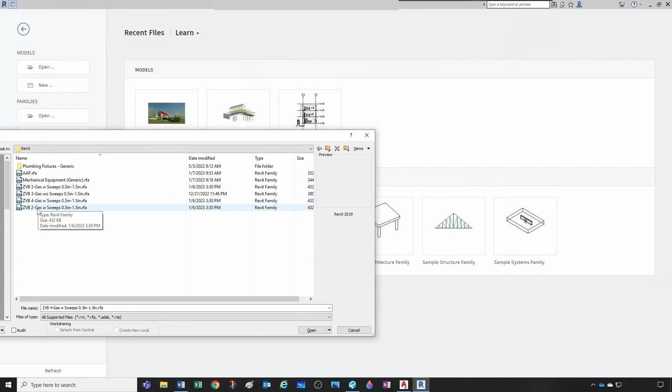I'm gonna open, and now I'm gonna go to the front view, and then if we go to the cut sheet, what you'll see is that this is the one we had, right? 3 gases, so we had this one, and this one. So all we have to do is shorten this a little bit so the box is 10.5 inch high, and it only has 2 connectors.

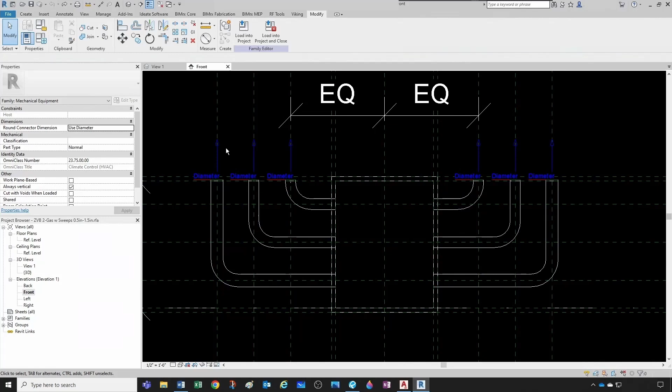I would say let's delete the 2 innermost. Actually, let's keep the 2 innermost and let's delete the 2 outermost so that the width remains as short as possible. So let's first delete the outermost connectors. So let's come to our extrusion, edit extrusion, and then let's delete this guy and this guy.

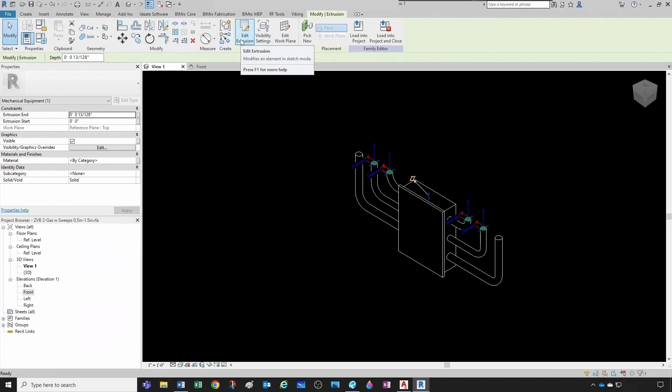The extrusion is now gone, and the connector which was hosted to the extrusion is also gone. So now let's delete the sweeps, and here. Now let's go back to our front view. Let's see if we can make a quick reference line here, a model line, like from here to here.

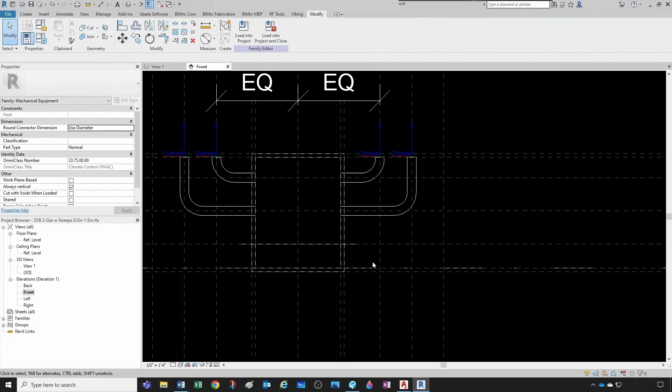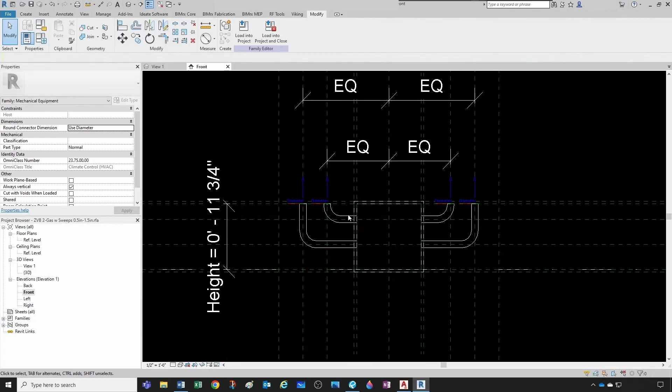And let's go ahead and delete this reference plane, and let's see if it allows us to move these 2 reference planes up from here to here. So it seems like this is pretty good. Now we just need to make sure that the height of the box has to be 10.5.

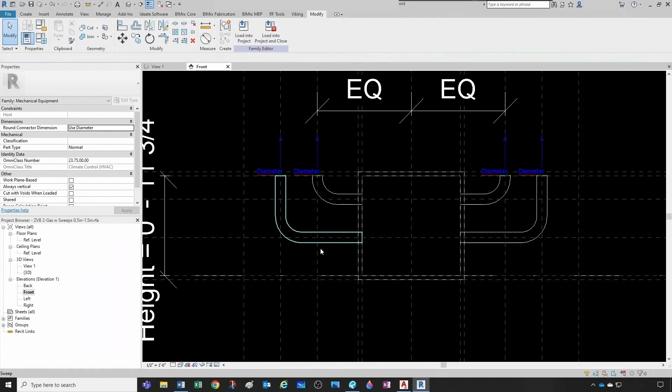How do we do this? We could probably just do another reference line. Let's see, 10.5 from here. But I don't want to modify this parameter like that because this was the fixed plane. So it's gonna make it shorter, but up here, and I don't want that. I want it to be shorter here.

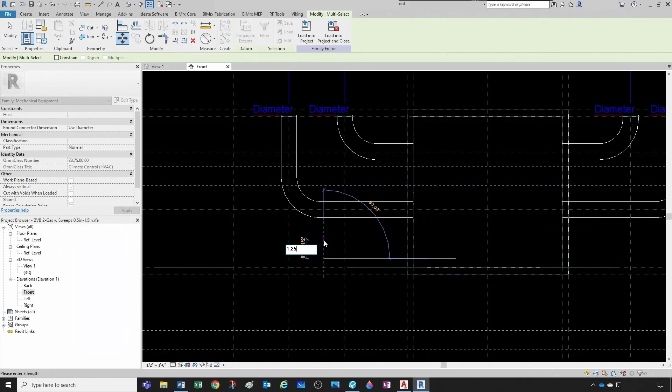So let's force that. We know that it has to be 10.5. So let's click here and click here and move up 1.25. And that would take this to 10.5. So this is the 2 medical gas box.

But keep in mind that these 2 connectors are of a system classification that is hydronic supply. So this is good for compressed air, medical air, but not for vacuum. If you want to use it for vacuum, you would have to change the connector to hydronic return because it would be sucking instead of pushing.

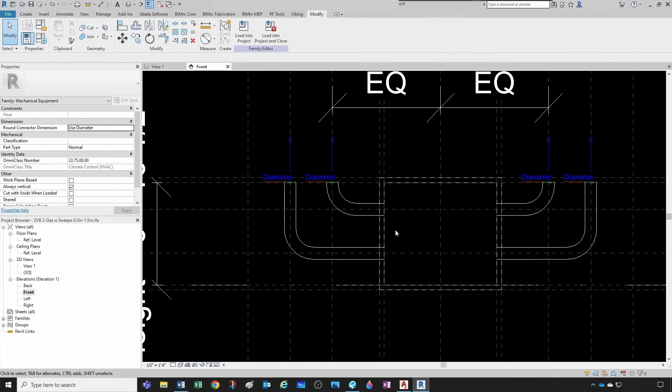We obviously have to clean this up a little bit, so we have to get rid of this parameter, we're not using it anymore. This horizontal offset, we're not using it either. Actually, we're not using any of these parameters anymore, because remember we replaced them with this one, the nominal pipe diameter. So this we can delete, this we can delete, and this we can delete.

We can rename this as 0.5, 0.5, since we don't have the third one. We can rename this one to 0.75, 0.75.

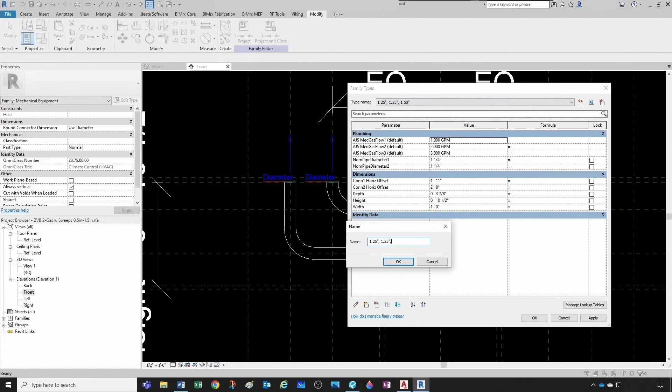We rename this one as 1, 1. And this one to 1.25, 1.25. We can actually delete these reference planes because we're not using them. And that looks pretty good. Let's take a look in 3D. Throw a little bit of shading in there. There we go. So that's the 2 gases. Let's go hit the 4 gases.

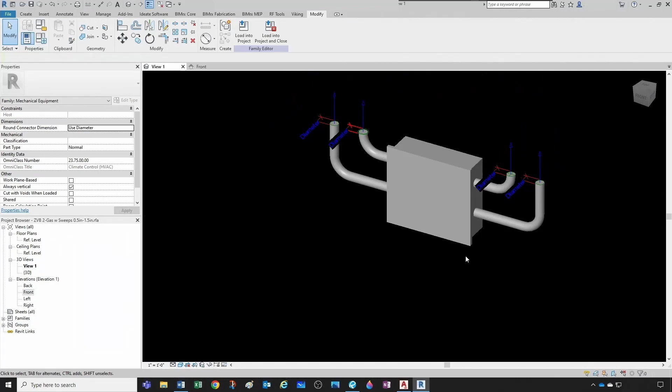I guess we'll never know, right?

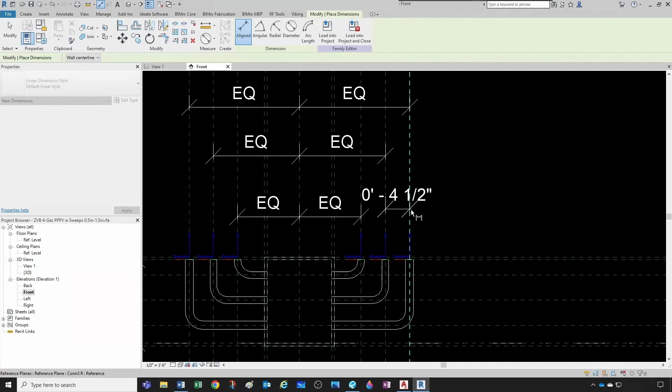So we open again the original 3 gas. Let's go to the front view. And here it seems that we would have to add another one down here. So the first thing we need to do is create a couple planes for the connectors, the new connectors. So what was the distance between here and here? 4.5 or something like that. 4.5. So right click here, create similar.

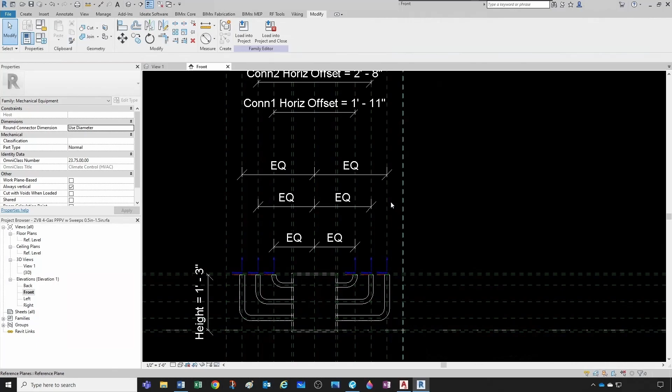We want to pick a plane. It's gonna be 4.5 inches of offset. And here we go, that's one. And this is the other one. And then we had named these planes like this, connector 3 right. So I'm gonna name this one as connector 4 right. And then this one as connector 4 left.

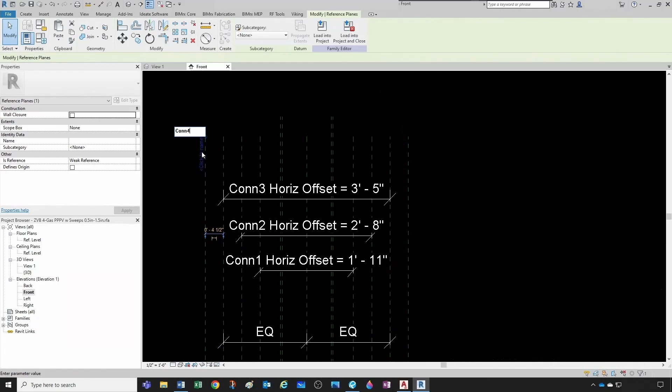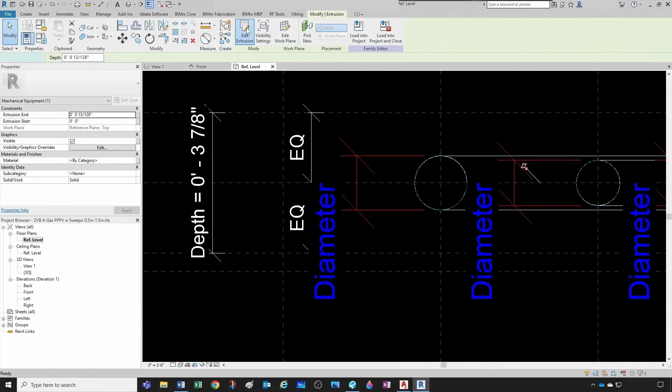Now we need to modify our extrusion here. So let's actually go to our top view, reference level. Then let's select our extrusion. I'm gonna do tab select, and then this is my extrusion. Let's edit that extrusion. And what I was gonna do is, let's just do a circle here somewhere. And then remember, we want to click on it and then make sure that the center is visible. So we can align AL to this plane, unlock it, and to this plane, unlock it.

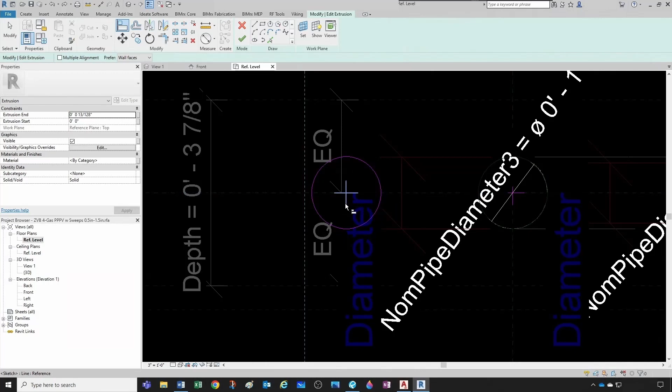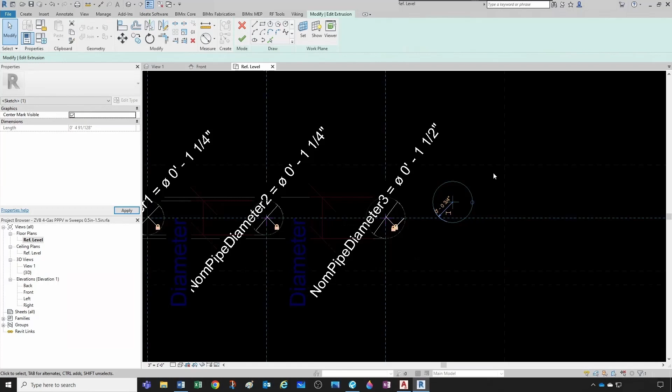And then we have to do the same thing on the other side. So right here, so let's create a circle. And remember, I'm doing this on purpose, offset, so that I can simply align to make sure that it's perfect. So AL to this plane, unlock it, to this plane, unlock it.

And now I need another parameter because before we only had 3 diameters. So now I'm gonna have a 4th one. So I'm gonna actually copy this name to have the same thing. You can always take a look at the previous parameter to make sure it was a family parameter type and it was piping, pipe size under plumbing. So let's do the same.

So a new parameter, it's a family parameter, it's a type parameter. The name is gonna be the same, but instead of 3, it's 4. We said that this was a piping parameter and it's a pipe size, and we grouped it under plumbing, and it was a type parameter, right? And now we just hit OK. And now let's keep this also as 1.5.

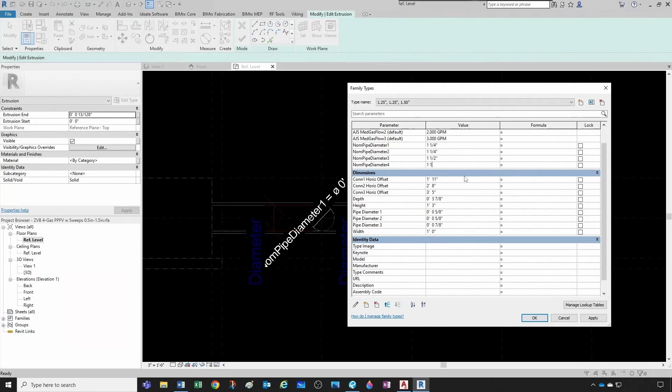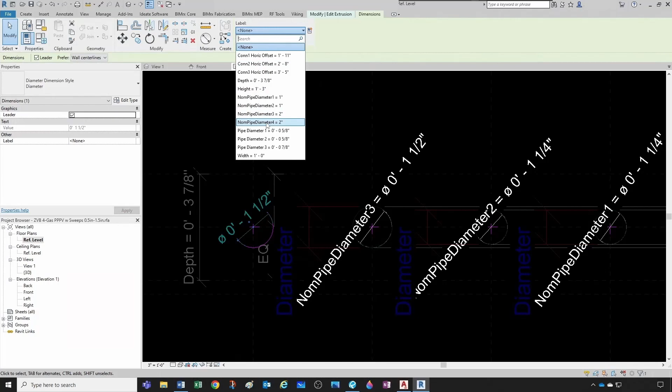And for now we don't see anything because that parameter hasn't been assigned to anything, right? So let's dimension this. And then we assign to that dimension the new parameter, nominal pipe diameter 4. And then we do the same thing with this one. Click here, nominal pipe diameter 4, and then we finish.

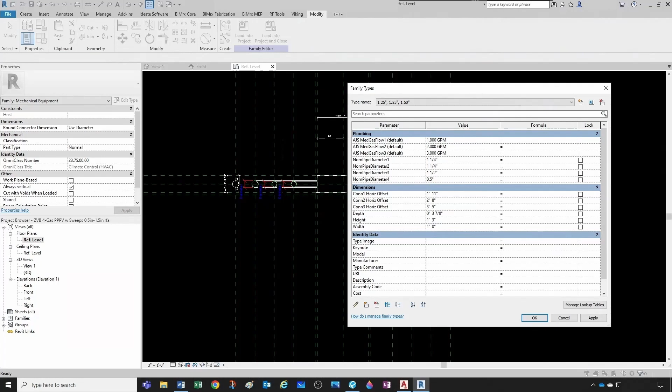Now, one thing that is important to note is that we shouldn't be using these pipe diameters anymore, right? Because we're using the nominal pipe diameter. So let's go ahead and delete this parameter, and this parameter. And now let's see how our last pipe diameter flexes. Let's go ahead and do, for example, 0.5 inches, and okay, and we can see how it gets reduced. So that's perfect. Let's hit undo.

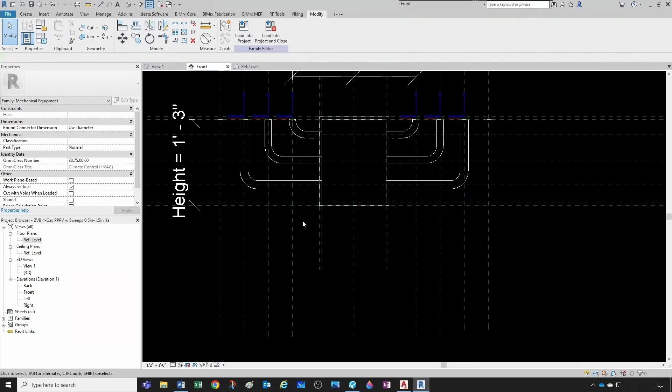And now let's go to the front view because we're missing that last sweep, right? So let's see how we can do that, because what we need is we need to bring this down to make space for that new connector plane. So if we come here, we see that that new height, if we were to have 4 medical gases, that new height would be 19.5. So let's create a reference line here.

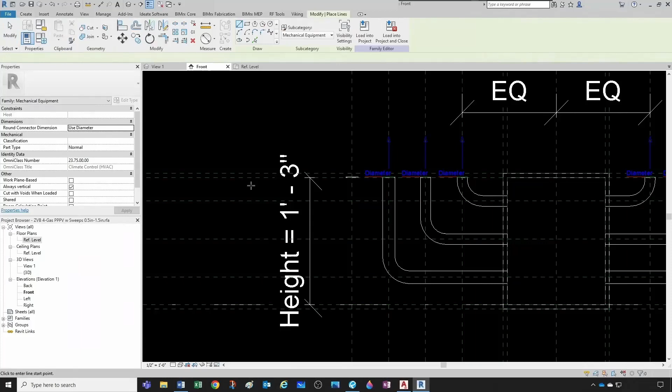At 19.5 inches. So we want to bring these two guys down from here to here.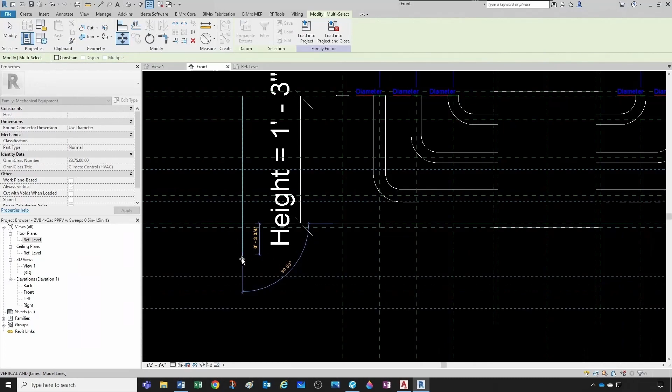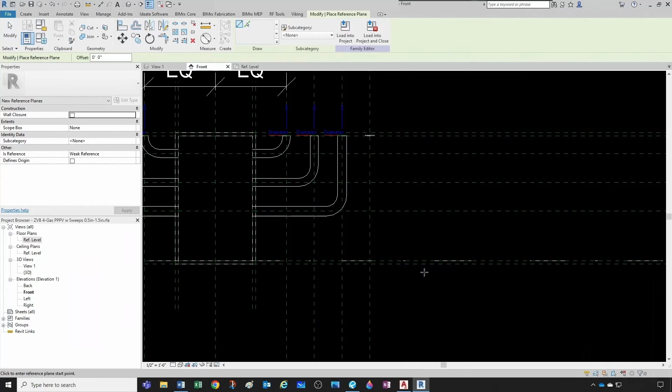Now what we're going to do is have another plane here. At which distance? I believe last time we measured it was 4.5. Correct, 4.5. So we click here, right click, create similar, pick plane, 4.5 inches of offset from the bottom, and then we had labeled this guy's connector 3 vertical. So connector 4. Then I'm gonna copy.

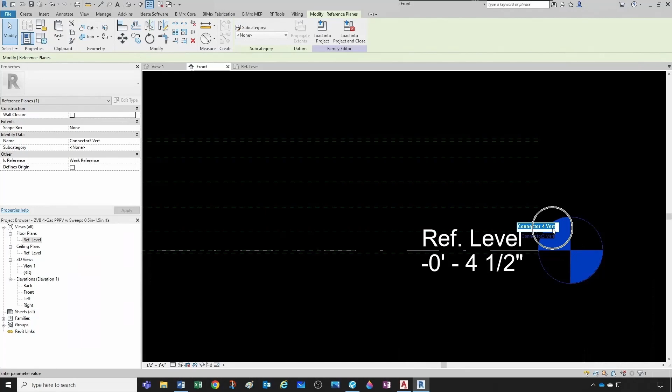That's it. I can take my reference level and take it out a little bit to avoid confusion. But that's looking pretty good.

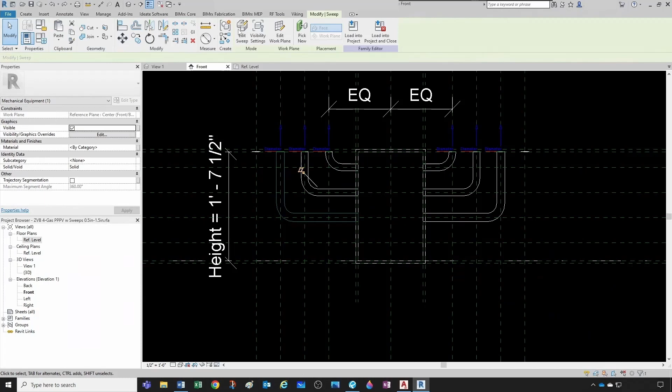Now we can do our sweep. Let's take a look at one of these sweeps so that we remind ourselves what the radius is here. Let's see under sketch path. We use 2.5. So let me just cancel out of here, cancel out of here.

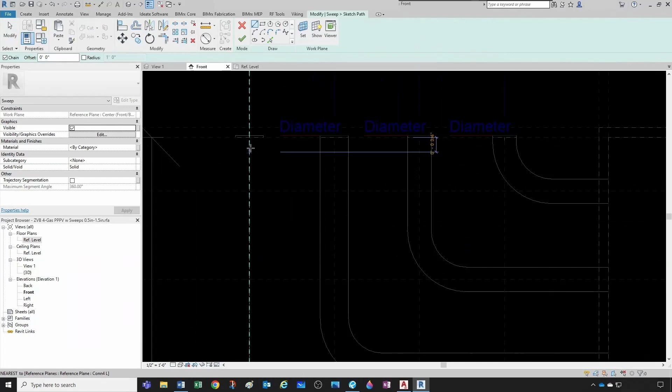Let's create a new sweep. So sweep, sketch a path. For that we can start here. Let me just do this real quick. 2.5 inches. I know that it has to get up to here.

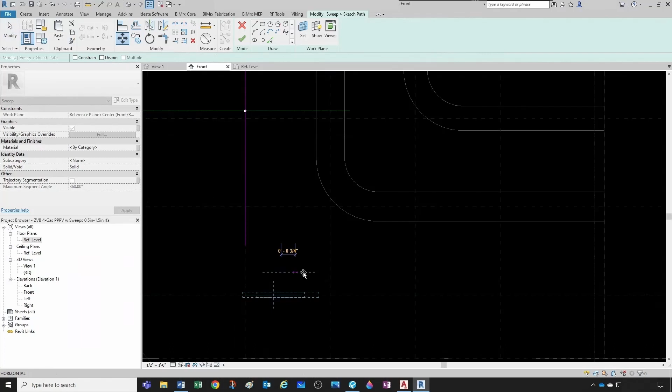Let's just get rid of this, get rid of that. And if I start another line from here, let me just move it away. We know that's 2.5 inches. And then extend it up to here.

Now we can do our arc tangent to this one, and this one. We can finish, and now we can go

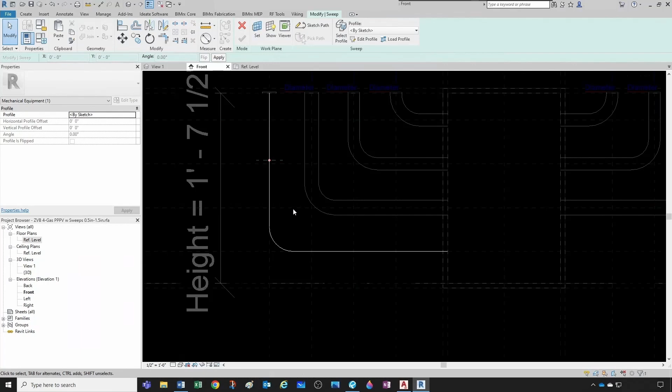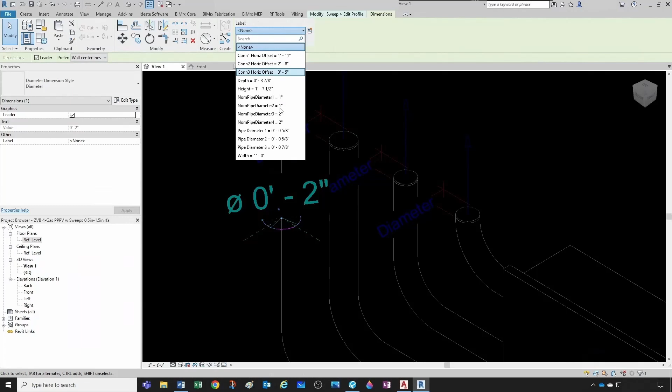to 3D view and then go edit profile, and we want this to be a circle. We can base it here, and then we want to dimension this, and we're going to associate to this dimension our pipe diameter 4, and now we can click OK here. We're done with the profile, so I can click OK here, and there's my extrusion.

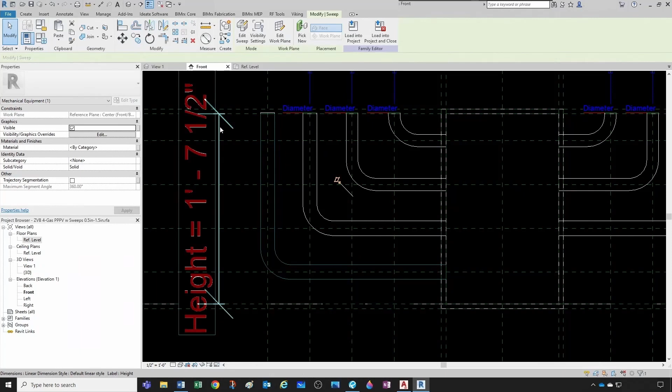Now I go to the front view, click on the whole thing. We want to mirror this pick axis, and we want to make sure copy is turned on, and that's our other side. Now all we need is our last connector, so we can come here to 3D view, and then let's take a look at the last connector here to make sure we're on the same page.

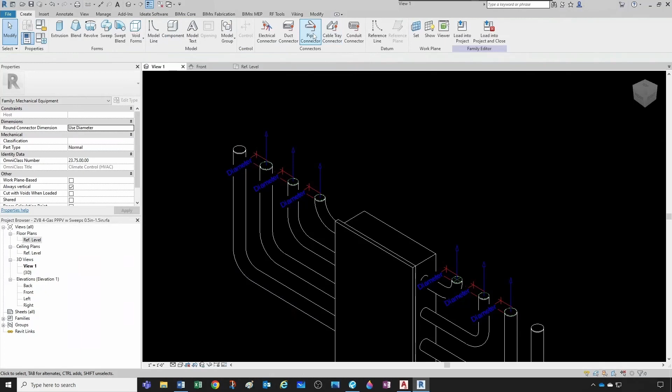And that was preset, out, not defined, hydronic return, and associate the flow. So let's do the same. Create pipe connector. Make sure we select the top one. Then click on the connector.

We said it was going to be preset, and the direction is out because it's going to be a vacuum type of connector. We can keep this as not defined, and the system classification is hydronic return. And now we associate the flow to parameter AJS MedGas flow 4, but we don't have that yet, so we have to create it.

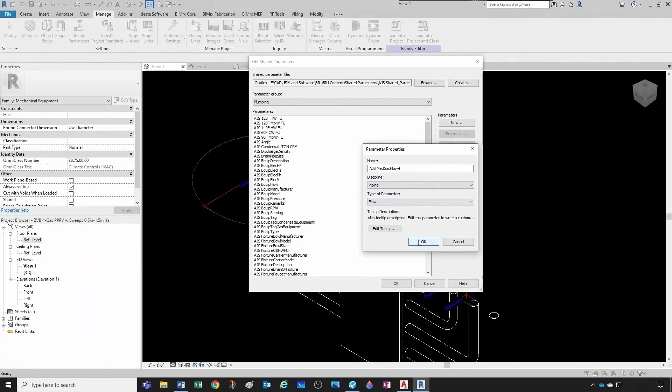So we have to go here to manage, and then share parameters, and then under plumbing we're going to add a new parameter, and the name is going to be AJS MedGas flow 4, because it's the fourth one, and the discipline is going to be piping, and we said that the type of parameter is going to be flow. Now I click OK, OK, and now I should have it available to bring it here as AJS MedGas flow 4.

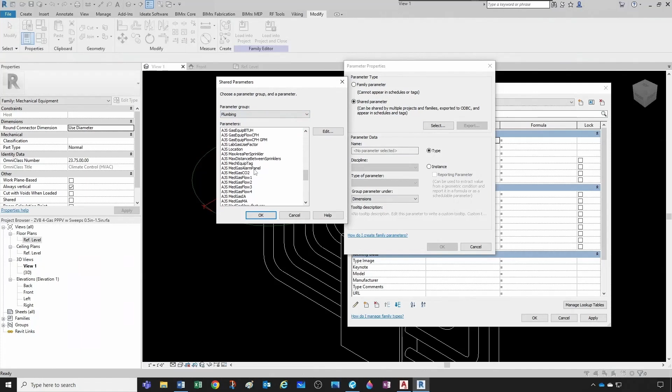So we come here to new parameter. It's going to be a share parameter. Let's go pick it from plumbing, and AJS MedGas flow 4. Here it is. We can group it under plumbing to keep it consistent. Okay, let's assign by default, let's say 2. So let's go ahead and click OK.

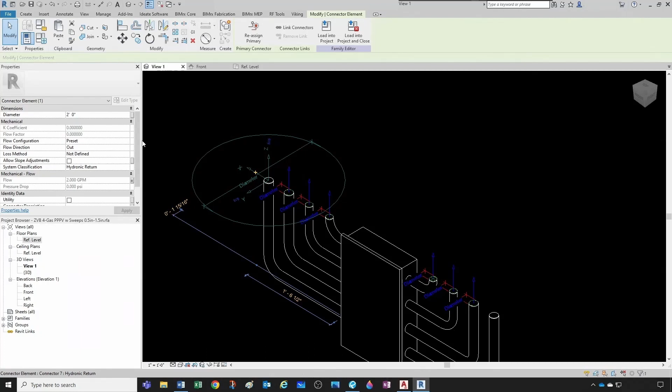And now that we have the parameter, we can associate the flow to that parameter. So MedGas flow 4. And I'm going to associate the diameter also to nominal pipe diameter 4. All right, now all I have left is this one here.

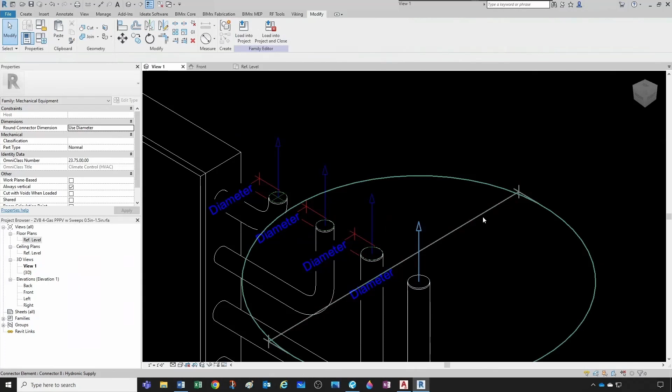So we can come here to create. We want a new pipe connector right here. We associate this diameter to nominal pipe diameter 4. We said, let's see how we did this one. This one was calculated because it's going to be reading from our system. So this one here, calculated, that's fine.

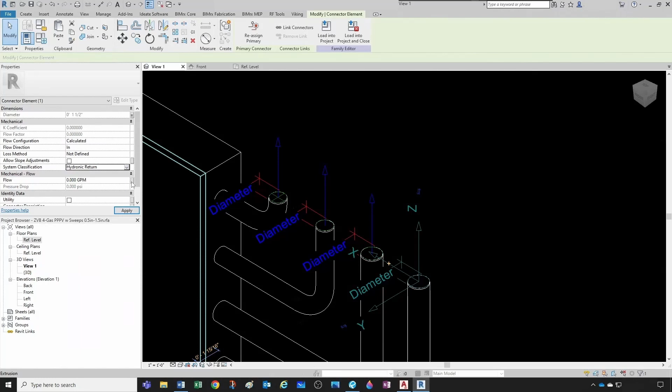Bidirectional, no, it should be coming in, right? Because it's sucking. Let's check. In. Hydronic return, that's good. So this one has to also be a hydronic return. And the flow is going to be the same one, 4. So very good. Seems like we're done.

Now let's throw a little bit of shading here. Looking good. There we go. So now we save and close.